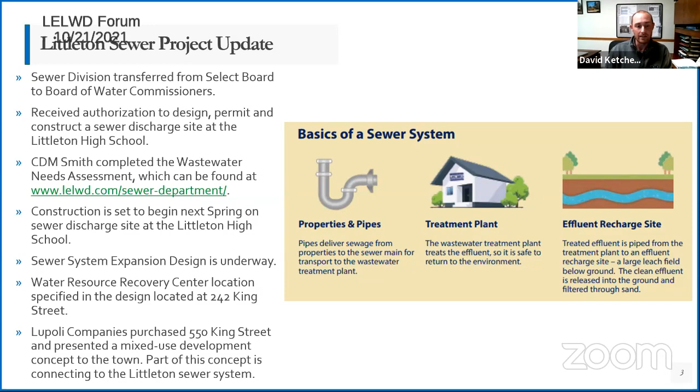In 2019, $1.6 million was appropriated to purchase land for the sewer treatment facility. There was also a voter petition to keep the sewer treatment facility from being placed at the highway department. In 2020, $2.5 million was appropriated to fund the design and construction of a larger sewer discharge site. Just recently, the Board of Commissioners voted to expand the sewer district to include 550 King Street, and an article is being proposed at town meeting next week to fund construction of the sewer expansion.

I want to talk about the existing municipal sewer system. This system flows sewage to the Littleton High School where it is treated at the wastewater treatment plant shown here. This treatment plant was built at the same time as the high school, roughly 20 years ago, to handle municipal building load, and currently serves 6 municipal buildings. The plant is nearing the end of its operational life and is using outdated technology to treat the sewage. This treatment plant needs to be replaced very soon.

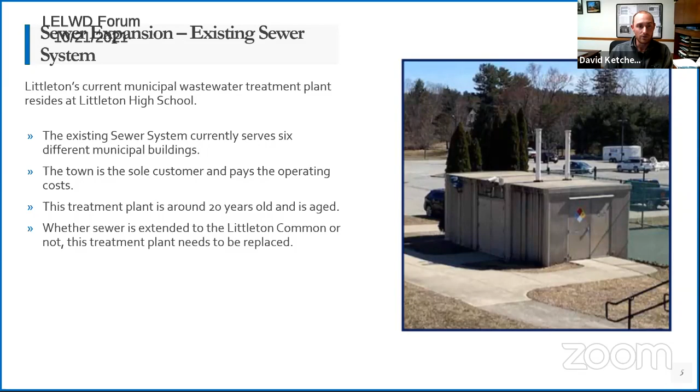With that being said, a sewer system expansion to the common would solve this issue. The sewer discharge site is currently designed, and we are working with Mass DEP to finalize the permit before going out to bid. We've been working with the school committee to minimize impact to student athletes as much as possible. Construction is scheduled to begin in the spring of 2022. Once complete, the field will be reconstructed using sod, and we hope athletics can continue to use the field in the fall of 2022.

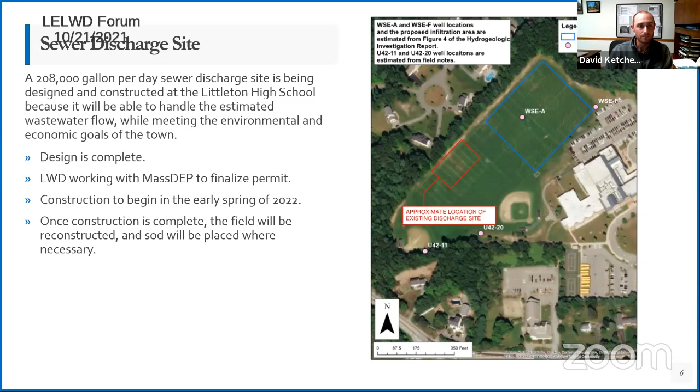As I stated earlier, LWD purchased 242 King Street recently, which will be used as the location of the proposed water resource recovery center. 242 King Street is centrally located to the sewer system and the recharge site at the high school. This property is in a secluded location, and the entire west side abuts I-495 with limited close proximity dwellings. It also abuts Beaver Brook, giving the water department an opportunity to protect the wetland areas and Beaver Brook surrounding it. This is environmentally beneficial because we would now have more direct control over the brook.

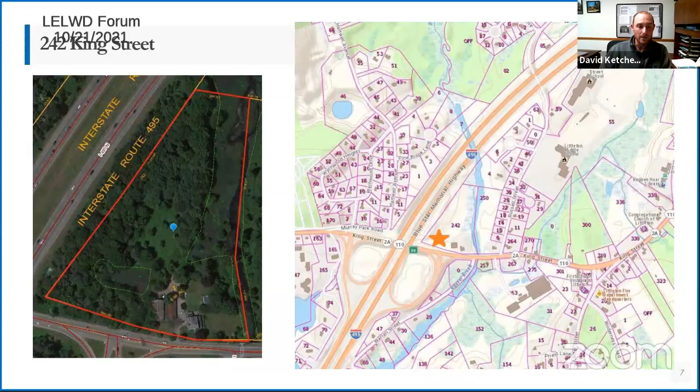In the slide, you can see a satellite image of the site as well as a GIS map of 242 King Street and the surrounding areas.

In August, the Lupoli Companies approached town officials and presented a concept for a mixed-use development at 550 King Street, a parcel that was not previously included in the sewer district. This would drastically change the approach, and because of that, the schedule changed, which I will touch base on at a later slide.

Currently, the town is the only user of the existing system and therefore is funding the system 100% through sewer rates. The addition of the 550 King Street development would add many more sewer users, which would result in lower betterment and user fees per connected property. At the request of the Lupoli Companies, the Board of Commissioners added 550 King Street to the sewer district. The proposed mixed-use development would be considered the largest user of the proposed sewer system and would therefore shoulder the largest portion of the project costs.

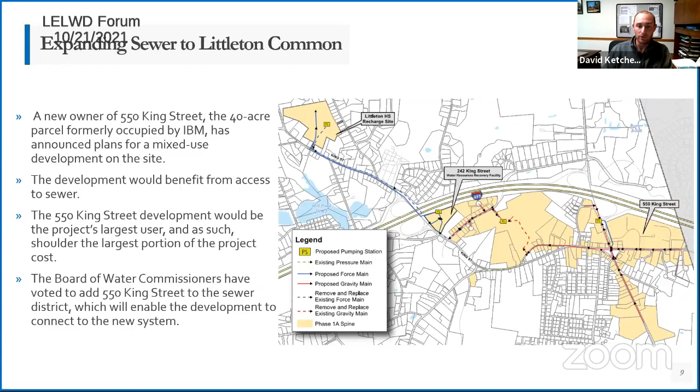The addition of 550 King Street would shift financial responsibility of the system from 100% on the town to roughly 60% on the 550 King Street proposed development, 20% on municipal buildings, and 20% on other users in the district. Those numbers might even be a little lower for municipal buildings. We're still working to finalize some of those numbers right now.

With that being said, CDM Smith estimated the total flow that would be required for each of these areas to be 180,000 gallons per day. This isn't existing wastewater flow; this is estimated flow if the areas were built out to what the planning department thinks each of these areas could potentially be.

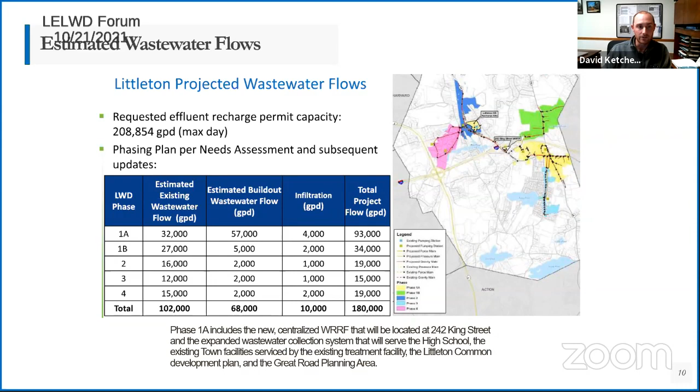To answer the question from the previous slide, we were designing a 175,000 gallon per day discharge site, large enough to handle the different phases identified by CDM Smith. However, with the addition of 550 King Street, we needed more capacity, so we amended the discharge design to add 2 areas shown in green between the blue areas.

This would give us a total of 208,000 gallon per day capacity, meeting current needs. There are also 2 additional leaching fields, the large green areas at the bottom, that could be built in the future to expand the system, improving capacity to over 313,000 gallons per day. So yes, 550 King Street will increase capacity, but we have a plan in place to meet the needs of future expansion.

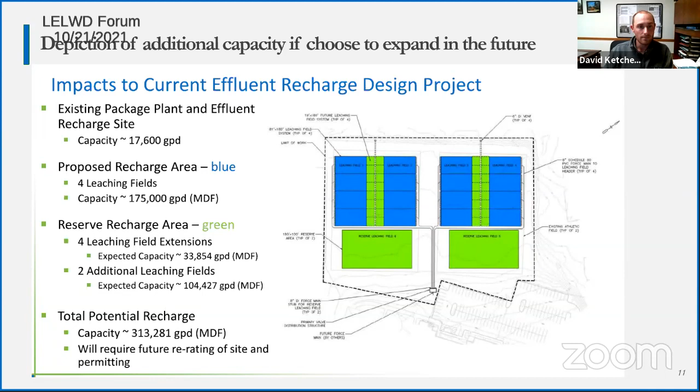For those who don't know, town meeting is this Monday night, the 25th, in the Littleton High School Gymnasium. Article 12 is maybe the most important sewer article to date in determining the future of the sewer system. This article would authorize the Board of Water Commissioners to borrow an amount not to exceed $25 million, to be paid through the Sewer Enterprise Fund.

With the town's approval of this borrowing authorization, the Board of Commissioners will be able to construct a 208,000 gallon per day sewer system. This article previously had a not-to-exceed number of 28.5 million, which was in the town meeting books sent out. However, we've received real pricing for the project within the last few weeks and were able to drop that number down by $3.5 million.

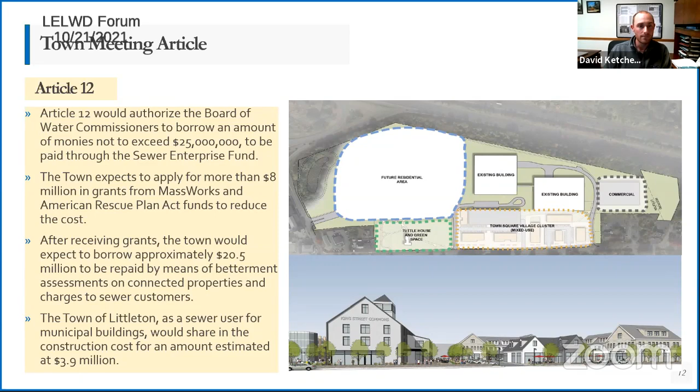Extending sewer into the common area will remove hundreds of septic systems from the Zone 2 and better protect drinking water quality for the town.

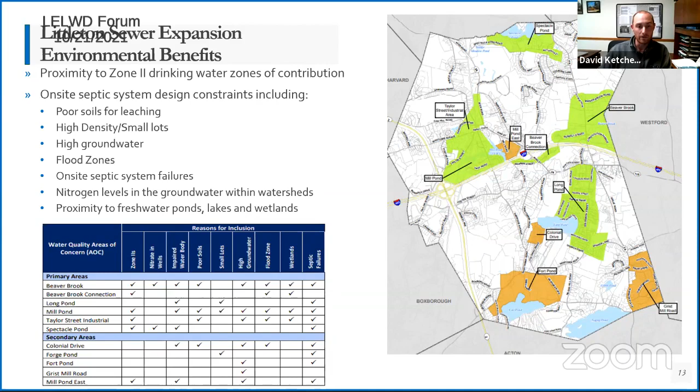So we used this number to apply for a state revolving fund loan, which we are hopeful to get for this project. We estimate this loan to be at a rate of 1.5% and are hopeful our application will be approved. In a later slide, you will see how we were able to cut this estimate from almost 40 million down to the 25 million I mentioned earlier.

Scenario A1 is the estimated cost to replace the existing system with a similar system at the high school, using all existing infrastructure, estimated at $6.5 million. Scenario A2 is to replace the existing system with a similar system at 242 King Street and not sewer the common. This scenario estimates a cost of just over $13 million because of the additional piping and pump stations needed to move the treatment facility.